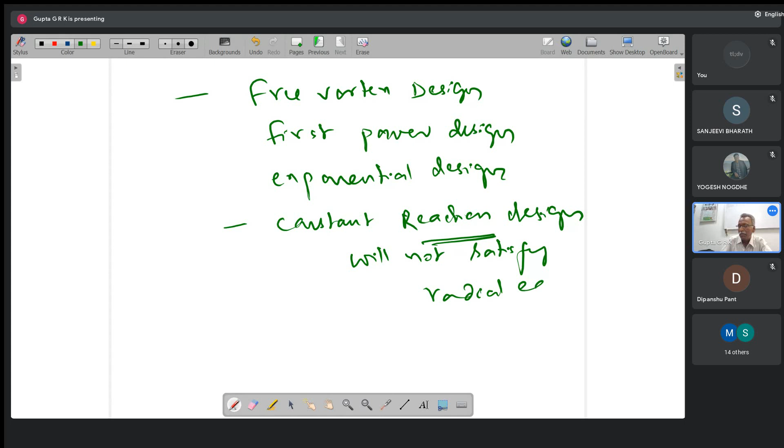Okay, remaining calculations will be somewhat similar, because once you know the reaction and you already know the axial velocity and blade velocity at the mean blade, you can get the other things from the other triangles, at other radii. Okay, so these are the things I think we have discussed, and then we are discussing the design process.

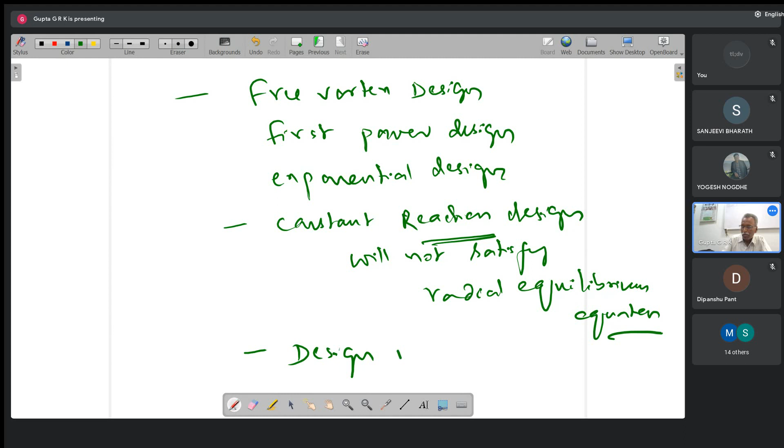So in the design process, we have to calculate the speed, annulus dimensions, such things, and then we have to get the pitch line design, right? That is at the mean radius. And design along the blade, that is from hub to tip.

Okay, so then comes the blade design. Okay, so this is what we are going to concentrate on today. So this needs understanding of cascade theory. Okay, so this is what we are going to discuss today.

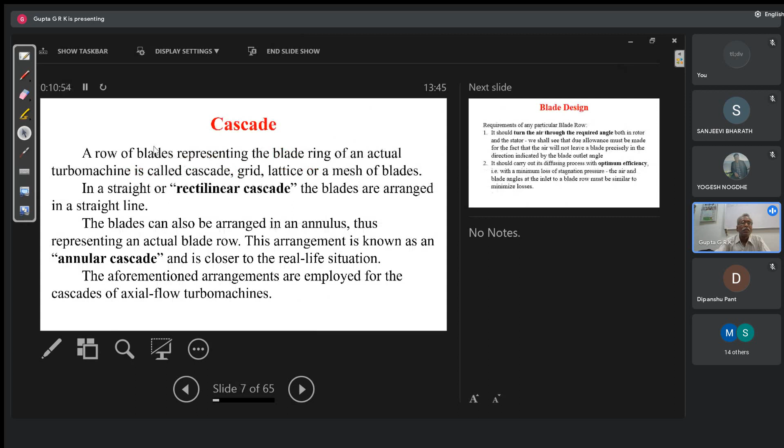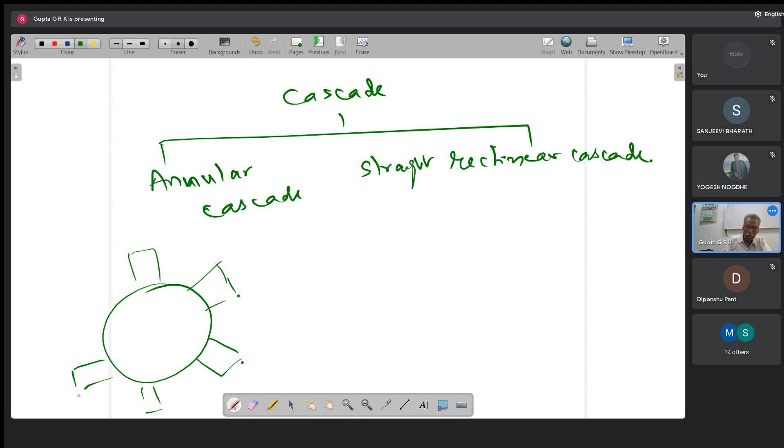Okay, so this cascade we were discussing. There are two types. One is annular cascade, and another is rectilinear, straight rectilinear cascade. Annular cascade means you will have a rotor-like thing, but it is stationary. So you will have blades on this. Okay, so this is annular cascade. Straight rectilinear cascade we have already discussed, like this.

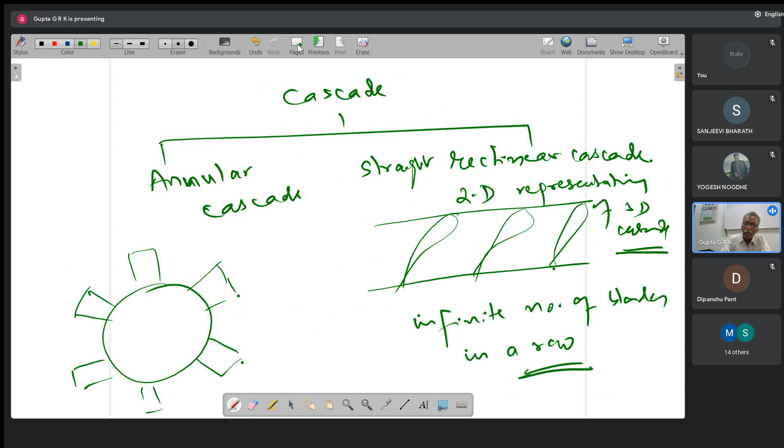This is an infinite number of... so this is called a 2D representation of a 3D cascade. Okay, and we have to do experiments on this. So you will have an annular tunnel and a rectilinear cascade tunnel.

Okay, so for each one we have this, and usually we prefer the rectilinear cascade tunnel, because with the annular cascade tunnel we have to do experiments on a number of annular cascades with different hub-tip ratios. So that's the problem with the annular cascade tunnel. So we prefer the rectilinear cascade tunnel. We can see some of the figures, how it will be.

Okay, and another thing is blade design. There are two things we require. We need the required blade deflection, which is epsilon, which is beta 1 minus beta 2. And the second one, required diffusion with optimum efficiency, or with minimum stagnation pressure losses.

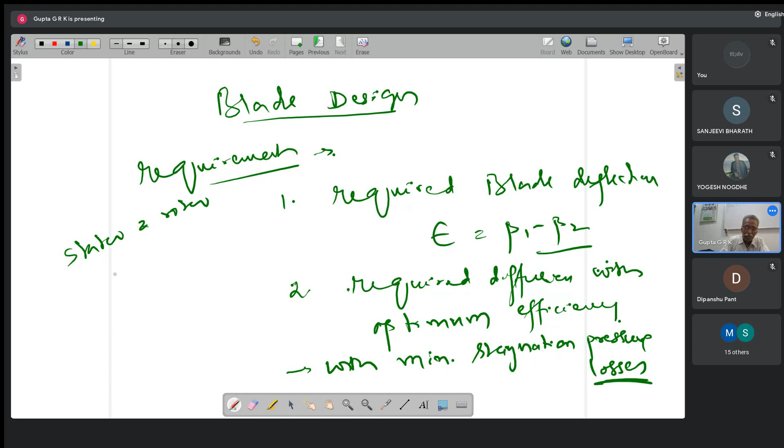Okay, because both stator and rotor are diffusers, right? So in the rotor and stator, which are diffusers, we know that W is 0 and Q is 0. So H naught is constant and T naught is constant, and P naught is constant if there are no losses, and P naught decreases if there are losses. Entropy increases and P naught decreases if there are frictional losses.

So that delta P naught, that is the stagnation pressure loss, should be minimum. So these are the two main requirements. Okay, so I have to measure, right? The deflection and the delta P naught. These are the two things to be measured.

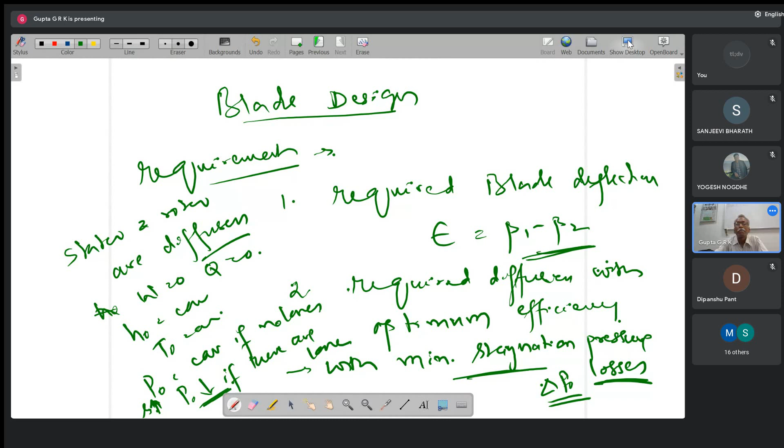And another thing is, when you design a blade, we are going to get blade angles. Till now what I was telling is blade angles are approximately equal to relative velocity angles. They are approximately equal, but they are different. So what we do is make a notation, right? Beta 1 and beta 2 are relative velocity angles, and beta 1 prime, beta 2 prime are blade angles.

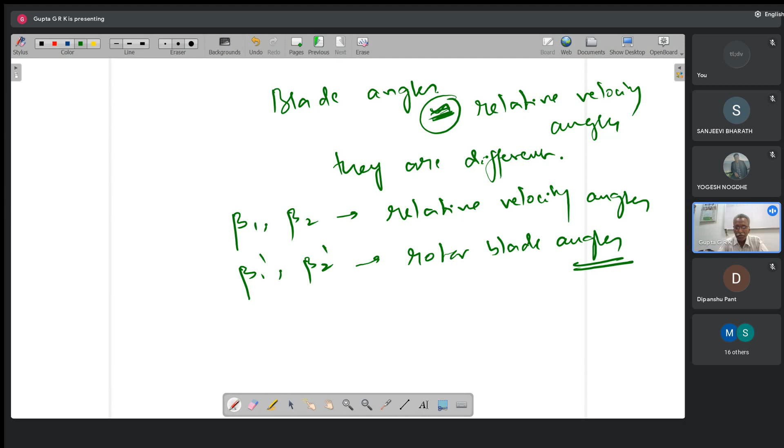Okay, there is a small notation difference between the book and the way I am teaching, right? When you take a cascade, a cascade is stationary, and so there is nothing like relative velocity, right? That's why he uses alpha 1 and alpha 2 for inlet angle and exit angle, and V1 and V2 for inlet velocity and exit velocity.

But I will be using beta 1 and beta 2 because we are using beta 1 and beta 2 for relative velocity. In the textbook, he uses alpha 1, alpha 2. Okay, so I thought there may be confusion. Just be careful about that. Okay, so that is one thing I wanted to tell.

Okay, and the choice of variables. Whenever you are doing a design, the variables are to be chosen based on the designer's experience and also based on correlations from experimental results.

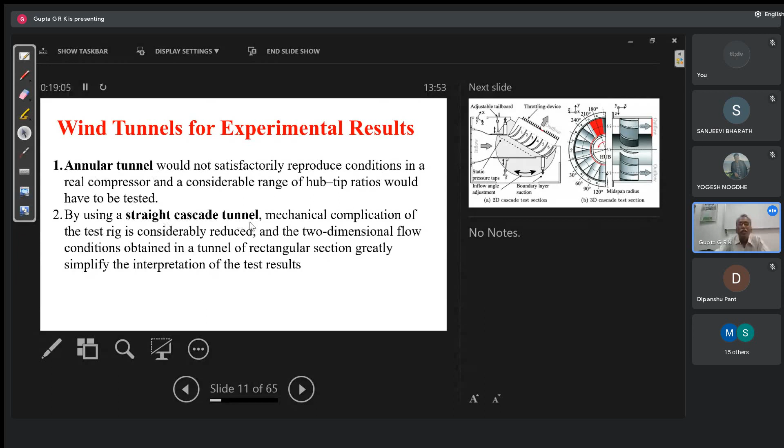Okay, so based on these two, we decide about the variables. And so these are the two types of wind tunnels we will have: annular tunnel and straight cascade tunnel. This is a straight cascade tunnel and this is the annular tunnel. So this is the way an annular cascade will be there, and there will be flow over this in this way. And here, this is the tunnel.

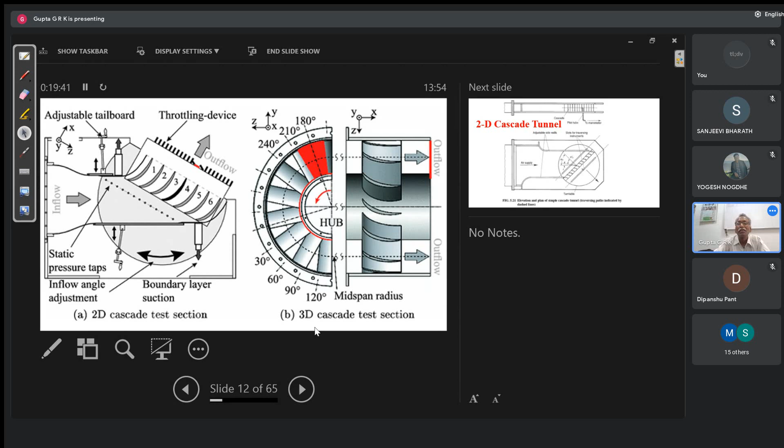Okay, I will show you the full tunnel later. And at the exit, there will be a rectilinear cascade, and there will be a provision for changing the angle of incidence. Okay, I will show you a better figure for this 2D cascade test section. This is the 3D cascade test section. Yeah, so this is the way we will have it. And okay, this is the complete tunnel.

And there are two types of wind tunnels, if you see. They are classified as direct flow and recirculating flow. Okay, so this is a very costly one, and if I don't want to have the air taken from the atmosphere, and if you want to recirculate the same air, this type is used, actually mainly preferred in water tunnels.

That is recirculation, because I cannot purify water every time. Otherwise, everything gets spoiled because of the salts in the water. So in IISc Bangalore, we have a recirculating water tunnel. But for a wind tunnel, it's not a problem. Usually we will have direct flow tunnels.

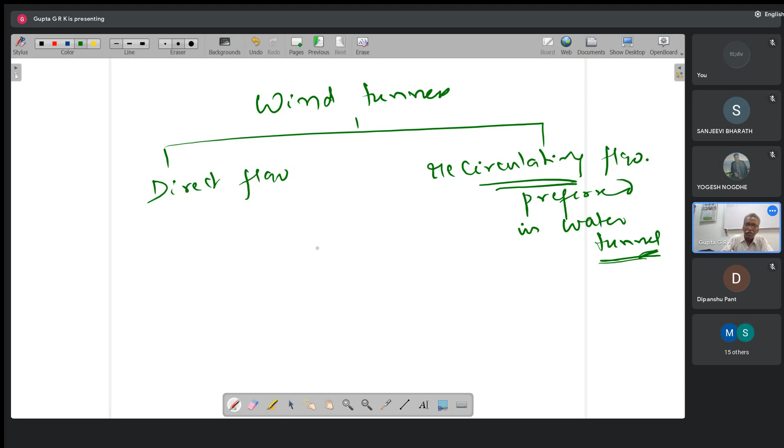And here there will be two types. One is suction type, another is blowing type. So I want to have an airflow in the tunnel. There are two ways we can get the airflow. Either you keep a fan at the entry and blow air, and this is blowing type. And suction type, have a fan at the exit and suck the air through it so that air flows. Okay.

Okay, we have this type of tunnel in our lab, a suction type tunnel. We have a fan at the exit and it sucks the air. So why we are having blowing type is because I have the cascade at the exit. You cannot have both the fan and the cascade at the same place. So the cascade is kept at the exit and we blow air over that. So cascade tunnels are blowing type. So we have the fan at the entry.

If you want to have a body here, an aerofoil or aircraft or automobile model, and you want to study it, then we will not have blowing type. We will have the fan here and it sucks the air. If I have the fan at the entry, the flow will get a lot of circulation and disturbance. I want a smooth parallel flow on the body. So normally in laboratories, where it's not a cascade tunnel, normal tunnels are suction type only. The cascade tunnel will be blowing type.

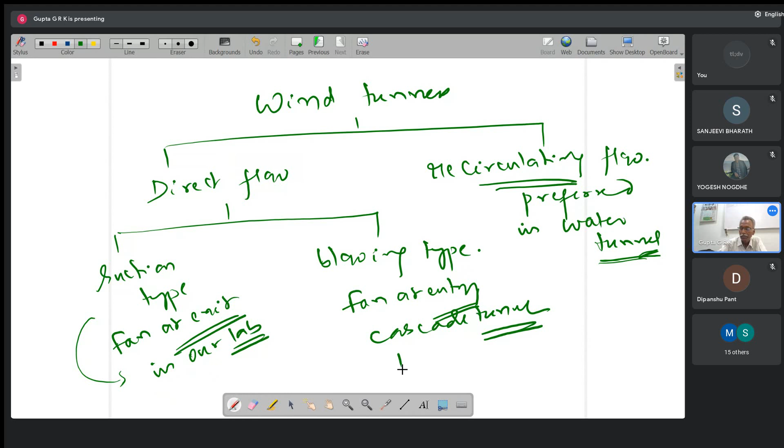Okay, and even transonic tunnels and supersonic tunnels are all blowing type only, right? Maybe I can write that. So in transonic and supersonic tunnels, we store a large amount of air at high pressure and suddenly release it at the entry. So it just goes with high velocity. I cannot have a continuous supply of transonic or supersonic flow air, right? So these two are intermittent type.

So I will have intermittent flow, okay? I will have large stored air, suddenly released, and until the air is over it will go with transonic or supersonic velocity. And again we stop, fill the reservoir with high pressure air, and again release it and blow it. Like that. Is everything clear?

Yes, sir. Yeah. Okay, once or twice I will just ask and you respond. Otherwise, everything is a calm class, right?

Okay, this is the cascade tunnel. Here, this is the entry duct. And here is the fan or blower, both are similar, which increases the pressure. And we have a conical diffuser, right? So that a large area is covered like this.

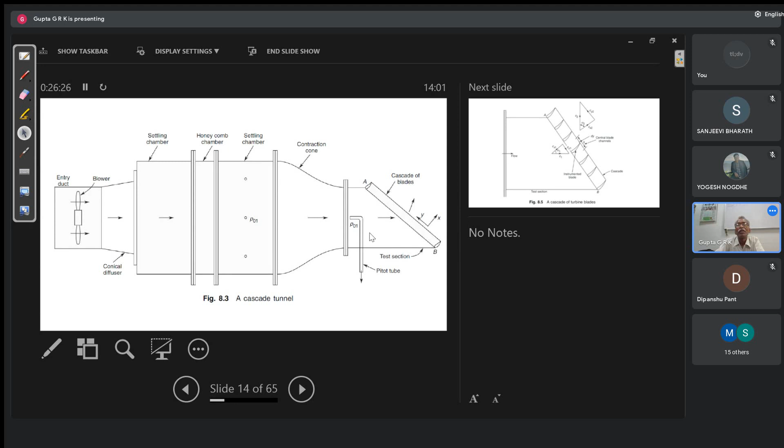But here, because I have a cascade, I will have a cascade here like this. So this cascade is kept and the flow is blown over that, and it takes the turning. And here I have to keep probes. So this is to find out what is the P01, stagnation pressure at the entry. And I will have probes kept like this.

So here you can have a probe which can be traversed. From this point to this point, I can move the probe and calculate how the things vary. And here also I can have a traversing probe. So there will be a slot kept here, and you can put the probe through that and just move it along, so that I can measure along the length. So that is that.

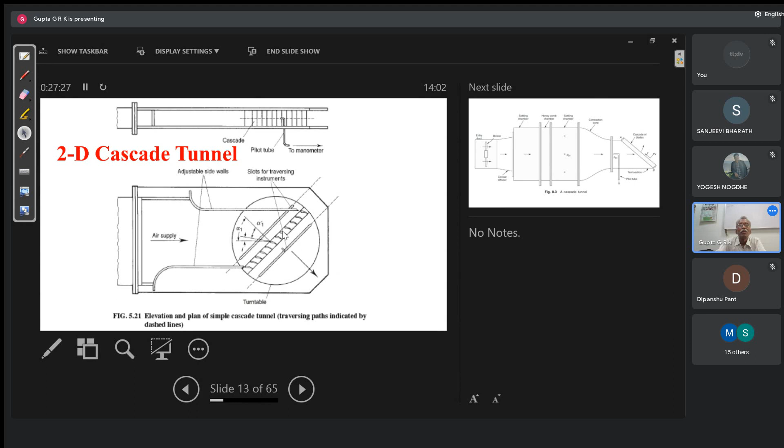And here there is a turntable mechanism like this. On this I have the blades kept, so I can rotate this one, so that the angle of incidence can be changed. When I rotate it, the angle of incidence can be changed for the cascade. So these are the things that are there, and I'll have the probes also.

There are two types of probes. These are called yaw meters. We use pitot static tubes for measuring the total pressure, and then yaw meters. These are to calculate velocity and the direction. So here I will have two holes, or there are holes like this, so that I can find out. Actually, suppose you keep a stagnation pressure probe.

So how to get exactly the direction of the flow? I will have two probes on either side, and if I get the stagnation pressure the same on both, then it shows the direction of the flow. I think it is explained here. The principle of operation is the same in both and consists of rotating the instrument about its axis until a balance of pressure from the two holes is obtained. The bisector of the angle between the two holes then gives the air direction. That is the way we find out the direction of air.

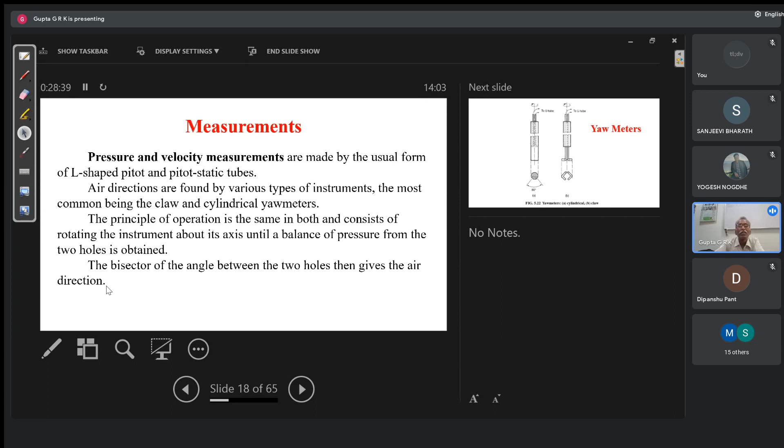So we are going to measure P01, P02, and beta 1, beta 2, the velocities and directions at the inlet and exit, and total pressure. This total pressure loss, P01 minus P02, is represented as omega bar. This is total pressure loss. And the non-dimensional total pressure loss is omega bar by half rho V1 squared.

This is called the pressure loss coefficient. The pressure loss coefficient also represents drag. And epsilon is beta 1 minus beta 2, which is deflection, which represents lift.

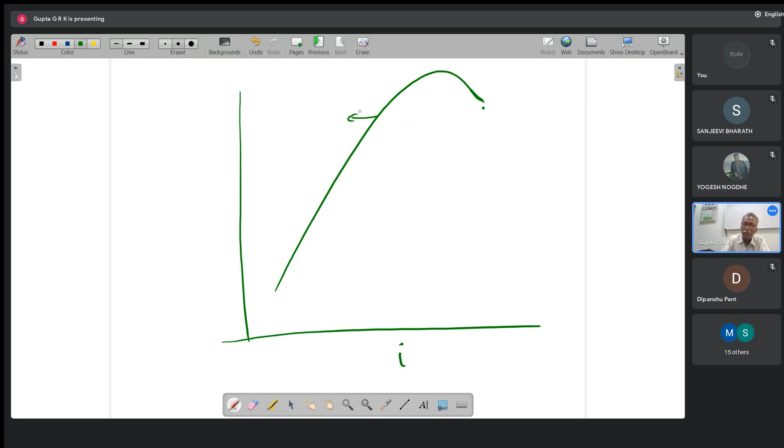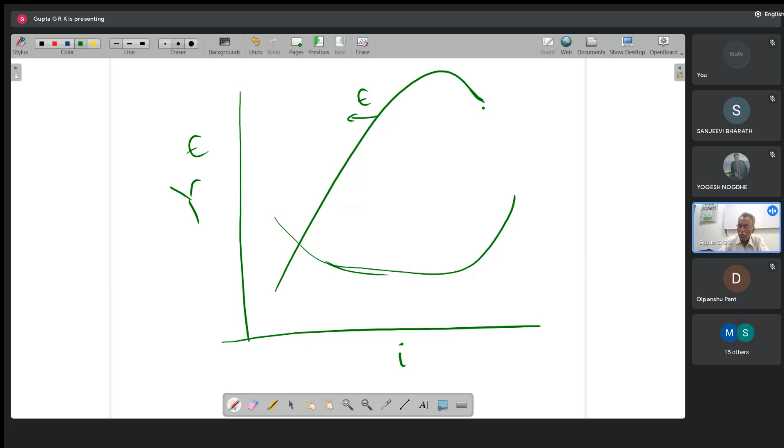And the total pressure loss coefficient Y is like drag, so it comes something like this. In between it will be a flat part, and then it will increase like this. And this is the point of stalling. This value here is called epsilon s, stalling deflection. Sometimes there will also be a little bit flat, I don't know exactly where it comes. So there is another way of doing it.

If I find out this is Y minimum, and if you take a point where the losses are 2 times Y minimum, this point corresponds to the stalling point. Wherever you get double losses, there the stalling deflection will come.

So when I design, it should not be near to that. It should be a little bit away from that, so that whenever incidence changes, it should be safe. There should not be stalling. So usually we will keep what is called epsilon star. This is called the nominal deflection.

And how much is it? It is 80% of stalling deflection. Okay, so this is the design point we'll keep. This is the safe deflection. It is better to design for that. Okay, so that is the way we do it.

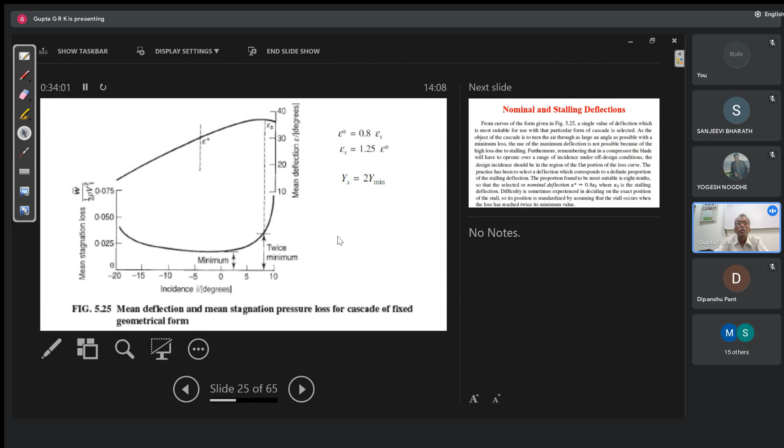And epsilon star is 0.8 epsilon s, or epsilon s is 1.25 epsilon star. And this stalling loss is equal to 2 times y minimum. Okay, and so we are going to get curves like this. For different S by C pitch chord ratios, I'm going to get for each beta 2 what is the epsilon star. So I'll take beta 2 here and epsilon star here.

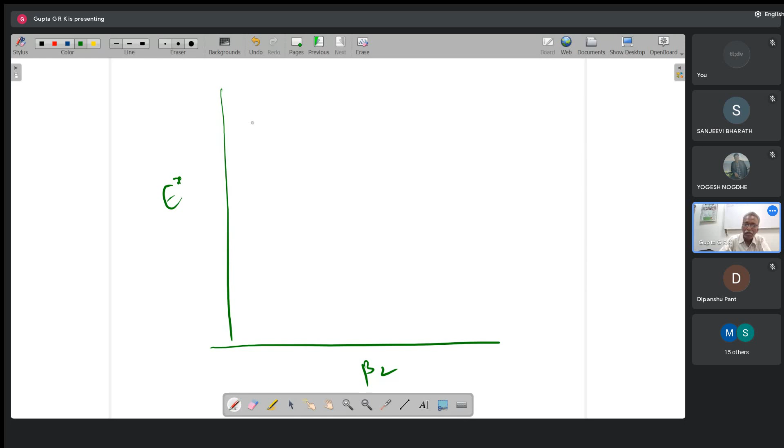So S by C is 0.5 and S by C 1.0, 1.5. S is pitch and C is chord. Okay, here actually we are doing the design. At pitch line design, we got all the angles, so beta 2 is known and deflection is known. So I can find out the optimum pitch chord ratio. So select S by C from the graph for the values of beta 2 and epsilon. For these values, what is S by C, I have to choose from the graph.

Okay, you may not always have this graph. So this is given through a correlation, called Howell's correlation. Whether you use the graph or the correlation, you get almost the same S by C. These graphs are represented by a relation like tan beta 1 star minus tan beta 2 star is equal to 1.55 by (1 plus 1.5 S by C). Howell's correlations are very important and useful in blade design. This is one of the correlations; another we will discuss later.

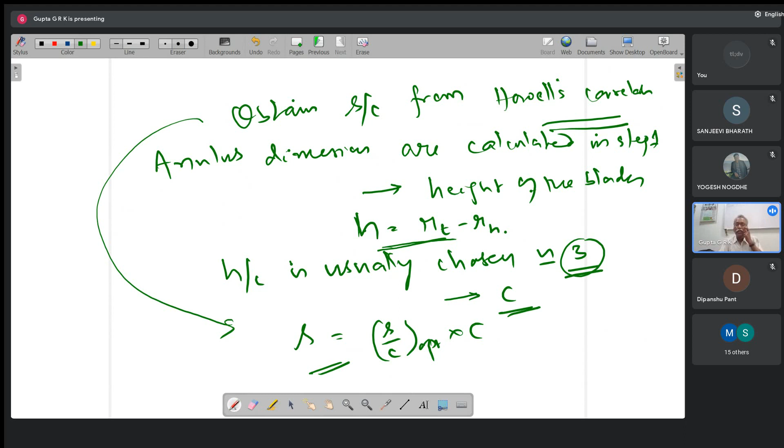So once you calculate h from the annulus dimensions, this gives me the chord c. And S by C is already known, so S is equal to S by C optimum into chord, which gives me pitch. Once I know pitch, I can calculate the number of blades: N is equal to pi D by S. Annulus dimensions are already calculated, so tip, hub and mean diameters are known. These calculations are repeated for both rotor and stator, giving NR for rotor and NS for stator.

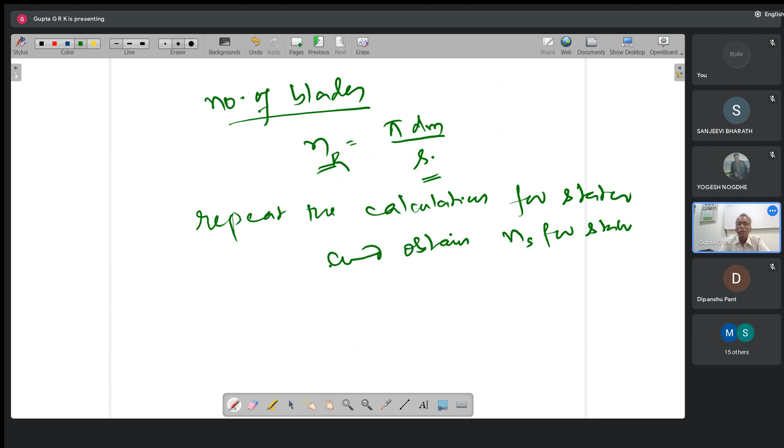Okay, here one check is to be made. There should not be common multiples between NR and NS. Why? To avoid the possibility of resonance. There will be harmonics, and there should not be any match of them, otherwise there will be resonance. So I have to choose NR and NS properly. There are two choices: an even number for NS and a prime number for NR, or an even number for NR and a prime number for NS.

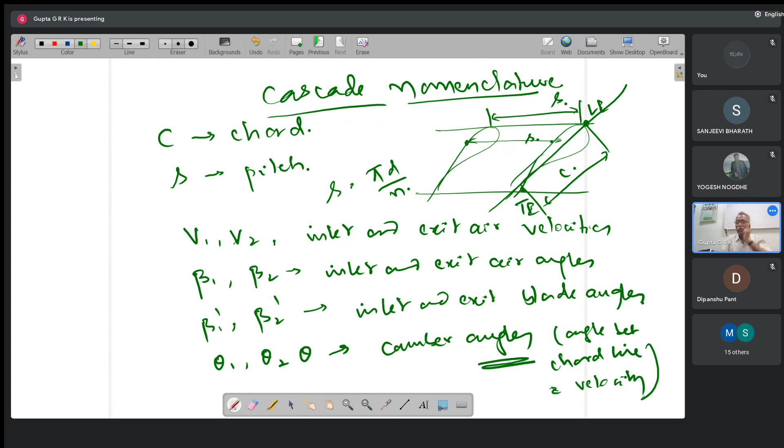Okay, and beta 1 prime, beta 2 prime, these are inlet and exit blade angles. And theta 1, theta 2, theta, these are all camber angles, that is, angle between chord line and velocity. Some more also we will discuss.

Okay, if I draw a line joining the leading edge and trailing edge, this is the chord line, and this is the axial direction at the inlet and exit, right? This is the tangential direction. The blade is going like this, and all angles are measured with respect to the axial direction. And this angle is called stagger angle. Lambda is called stagger angle.

And if I draw a mean line, this is called the camber line or mean line. If I draw the tangents at the inlet and the exit, the angle between these two at the inlet is theta 1, the camber angle at the inlet. And the angle between these two is theta 2, the camber angle at the exit.

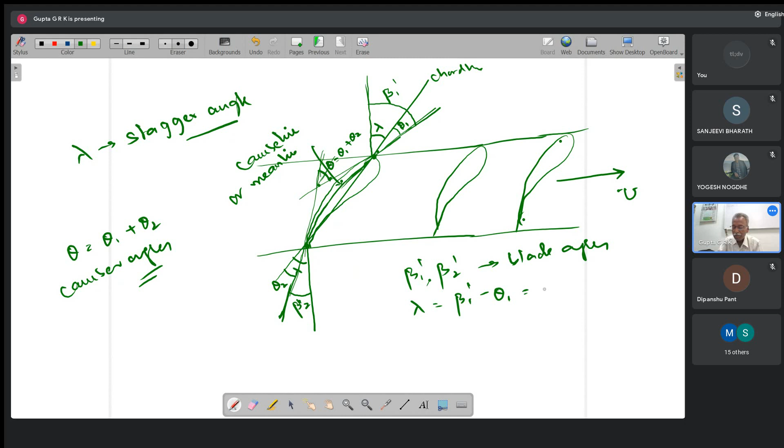And this angle here is the blade angle, beta 1 prime, because this is the actual blade angle. Similarly, this is beta 2 prime, blade angle. And how these are related: at the inlet, lambda is equal to beta 1 prime minus theta 1, and at the exit, lambda is equal to beta 2 prime plus theta 2.

Right? And the total camber theta is equal to theta 1 plus theta 2. So from these two relations, I get beta 1 prime minus beta 2 prime. This is the planned deflection, how much camber angle I have given. So the air has to turn to that angle, right? If air angles and blade angles are the same, this theta must be the deflection.

Okay, so I have given a bend or the curvature in such a way that it gets deflected by that angle. So this is beta 1 prime minus beta 2 prime. And now I am telling air angles are different to blade angles. The air enters with some angle of incidence. That is, instead of beta 1 prime, it goes with a different angle.

So this I will take it as V1. At this angle it is entering. Actually it has to go in this direction, but it is going in this direction. So this is angle of incidence. And so the angle of the velocity is beta 1. The air angle is beta 1. Everything with the axial direction. So beta 1 and beta 2 are air angles.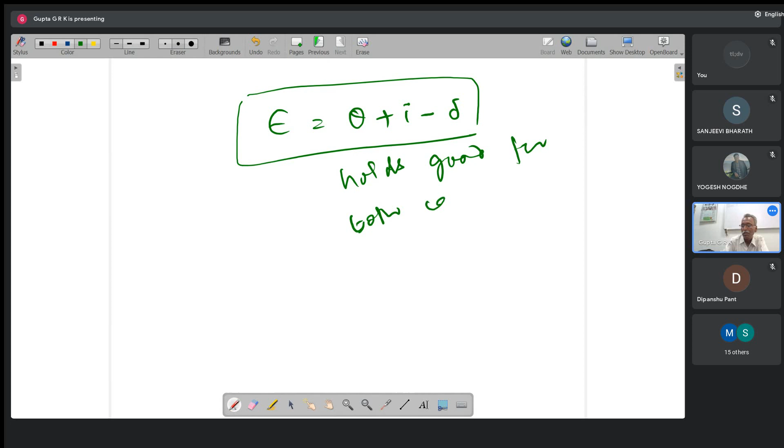So this equation holds good for both compressors and turbines. But I and delta will be a little bit different because the profile will be a little bit different; this one is decelerating, and there it accelerates. So the relations will be a little bit different for theta, I, delta, but this overall relation, epsilon equal to theta plus I minus delta, holds good for both compressors and turbines.

Okay, so this is the nomenclature for these things. And I have to calculate them. I is normally my choice, how much incidence I want to give, and theta is also fixed. So delta is the value I have to calculate. For this, again, we have correlations, Howell's correlation for deviation.

So delta is given as m theta (s by c) whole power n. This is the correlation for delta, where m is equal to 0.23 (2a by c) whole square plus 0.02 beta 2. This is a correlation, that's all. And a is the distance of maximum camber point from leading edge,

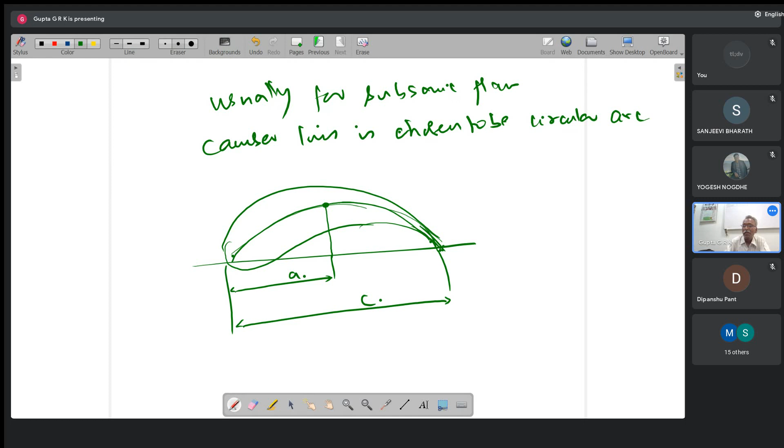And usually, for many subsonic flows, the camber line is chosen to be a circular arc. That is, the camber line will be taken like this, and if I take the blade, it comes like this. So this is a circular arc, and if it is a circular arc, the point of maximum camber is this, and this is A. Okay, so for circular arcs, A is equal to C by 2, or 2A by C is equal to 1. Therefore, m becomes 0.23 plus 0.02 beta 2. So like this it will be.

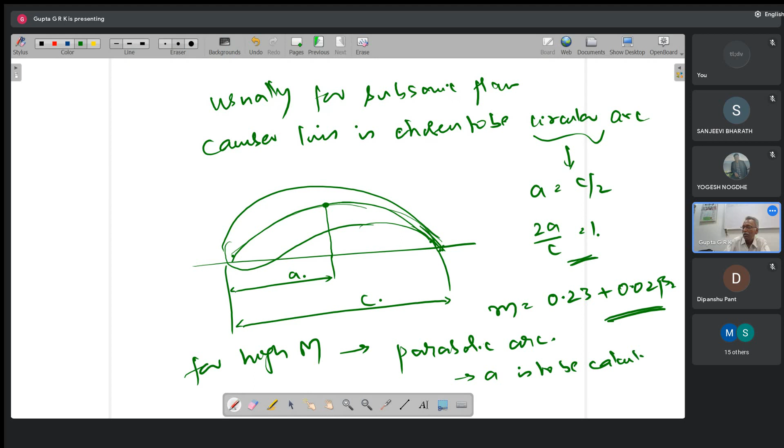Okay, and for high Mach number, we prefer parabolic arc, and A is to be calculated for this. And sometimes for transonic and supersonic compressors, we prefer double circular arc profiles, profiles with sharp leading edge and trailing edge. So it is something like this. Both are circular arcs. Okay, so for transonic and supersonic compressors, but usually for subsonic compressors, we prefer circular arc. So usually, if you get problems, you are going to get circular arc profiles only.

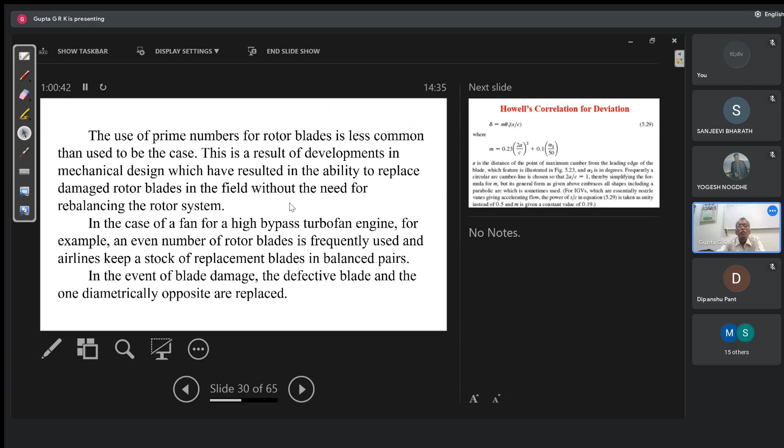Okay, so once I calculate all the angles, how to draw the cascade? So I draw a line like this and draw a line with stagger. Because I know this line, at stagger angle, you draw this. Okay, so what I do is I will draw a line with theta 1 camber here. And also here I draw with theta 2, just that.

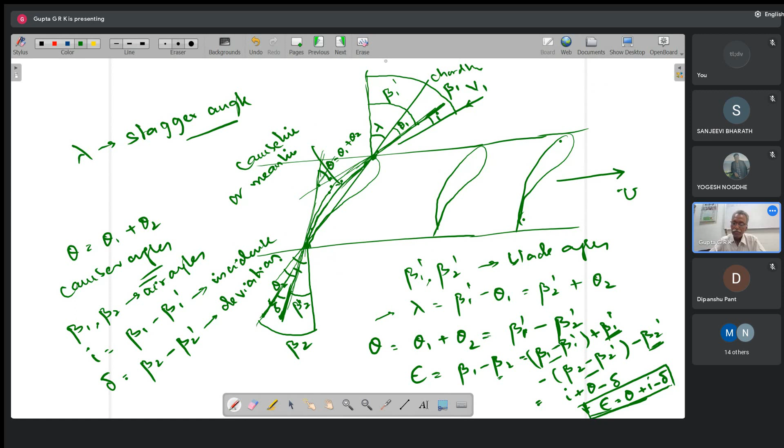So here what I am going to do is draw this line, and I am going to draw this particular line because I know theta 1 and theta 2. These two lines I know. So the leading edge and trailing edge are known, right? So if I join them, I'm going to get the chord line. So that is the way we do it. Okay. I didn't draw the lower line. That's why it's the problem.

Okay. So once I draw this line and take the chord length along this, here you draw the lower line. And now you draw a line with theta 1 and a line with theta 2 and extend these. So this is theta. And here you draw a circular arc, a parabolic arc, whatever it is, based on the type of camber line you want. So once I do that, I got the mean line, I got the camber line.

And here we take what is called a base profile. There are a lot of base profiles available from Göttingen, NASA profiles, and many profiles are available in data books. So you have to choose one of the profiles. And once you choose, the thickness distribution will be given to you. So this is the way base profiles will be there.

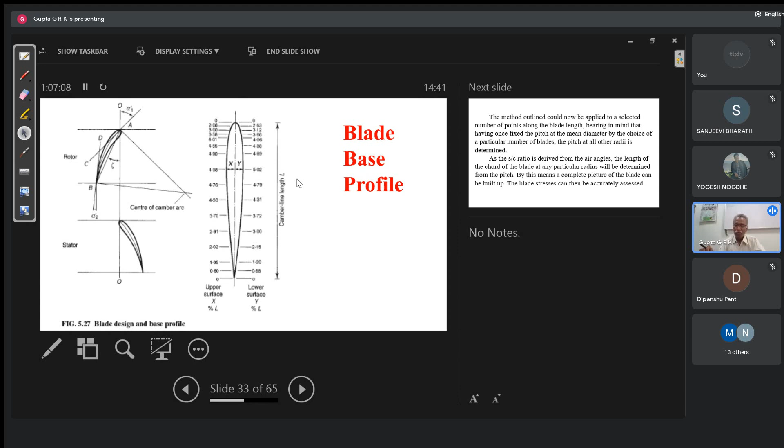Okay, and then once I design this, I have to do the performance. Cascade performance. So that is, I have to calculate the lift and drag coefficients. So I'll quickly do this. So if I take in this way, and if it is coming with V1 here, it is going with V2. And this is the average direction. This we call it as VM.

And so here I have the profile here. Okay. And this is direction of VM. And if I take this, this is beta 1. This is beta 2. And this is beta m. Okay. And there will be two forces. One is the tangential force. If I take a point here, so there will be a force in this direction, axial force, and a force in this direction. This is tangential force.

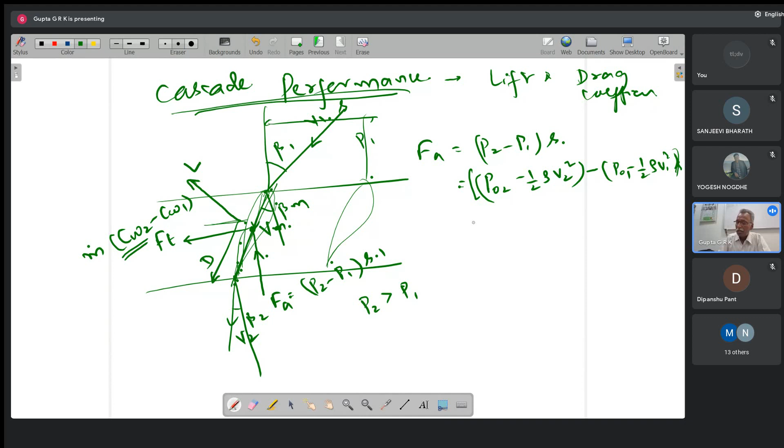Okay, and so if I draw this as the tangential direction, okay. Now FA is equal to P2 minus P1 into S. This I will write it as P02 minus half rho V2 square minus P01 minus half rho V1 square into S. Okay, so I already told P01 minus P02 is equal to omega bar. And I will write this as half rho into V1 square minus V2 square minus omega bar into S. Here also into S.

And this can be written as half rho CA square. And we have already written like this, secant square beta 1 minus secant square beta 2 minus omega bar S, or half rho CA square into tan square beta 1 minus tan square beta 2 minus omega bar S, half rho CA square S. This is axial force.

And if I take tangential force, mass flow is rho CA into S into 1. Okay, rho AV like that, density into velocity into area. So density is this, and velocity perpendicular to the direction of this area is CA. So rho CA S into CW2 minus CW1. I will write this as VW1 minus VW2. So CA into tan beta 1 minus tan beta 2. That is rho CA square S into tan beta 1 minus tan beta 2.

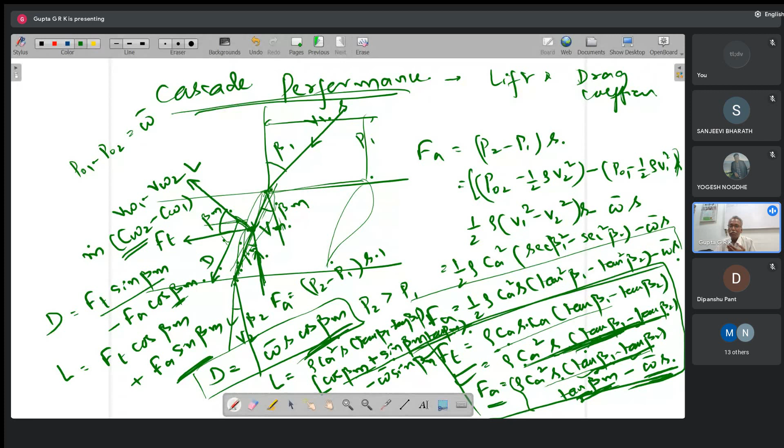Sin beta m into tan beta m becomes sin square beta m by cos beta m. So this becomes cos beta m plus sin square beta m by cos beta m. If I take LCM, cos square beta m plus sin square beta m by cos beta m. Like this it will become. Okay. So that is the way it happens to be.

So L is equal to rho Ca square s into tan beta 1 minus tan beta 2 by cos beta m minus omega bar s sin beta m. This will become like this, and D is omega bar s cos beta m. This is lift force and drag force.

And then I want to find out CL and CD: the non-dimensional lift coefficient is L by half rho Vm square C, and CD is D by half rho Vm square C. Okay, so this I have to substitute and simplify. We will do it in the next class. We are nearing the next class. We will continue this in the next class. Any questions till now?

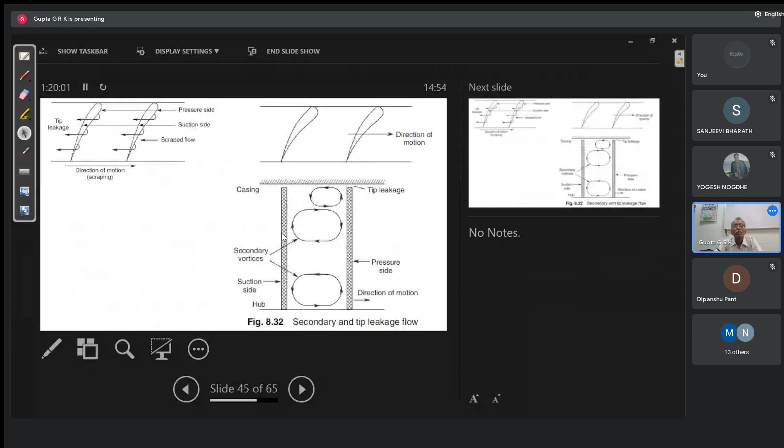So it is about J.K. Rowling. I think all of you know about her. Who is this? Writer of Harry Potter. Writer of Harry Potter, right? And now she is a big billionaire, right? One of the almost in richness, but it's not so easy thing, right?

J.K. Rowling did not have an easy ride on her way to the top. Right as she began writing and beginning work on the concept for the now ever famous Harry Potter book series, she became aware of the news that her mother had passed away. This news had sent Rowling into seemingly endless depth of depression, leaving her with little to no inspiration to continue working on her dream concept during this time, putting all her hopes and dreams on hold.

Eventually, to try and recover from the news, she had moved temporarily to Portugal to teach English. However, after a failed relationship abroad, she had returned home and further trouble on her doorstep with a baby daughter as a single mother. And she was on unemployment benefits because whatever government a little bit give for unemployees. So with that, she used to survive with the daughter. And something which for many who have experienced it is string thin, very small amount, as well as mentally draining. It makes you feel like you are in bottomless pit.